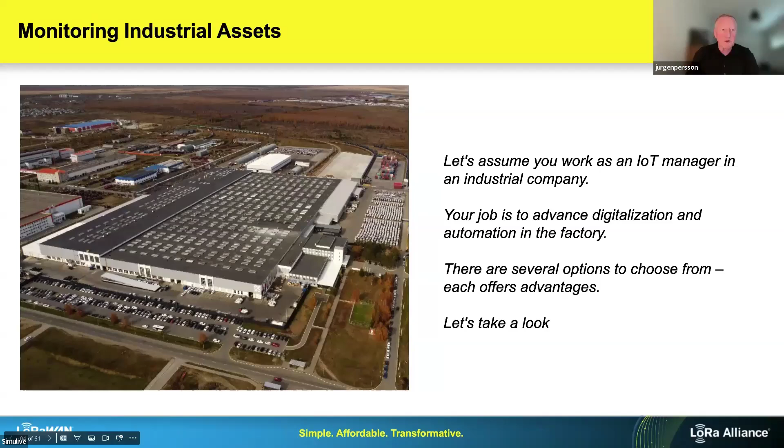We will continue with what we are doing within the LoRa Alliance. Within Smart Industries, we are not only doing manufacturing. By using the technology, we see that there are many industries with the ability to use LoRaWAN and bring digitalization to their operations. Everything from oil and gas, manufacturing, which we are looking into today, chemical processing, power generation and transmission networks, construction site management, general tracking and personal safety, and agriculture, things like machinery in the fields and livestock like cows, animals, and different kinds of things. So this is what we are doing within the smart industry group.

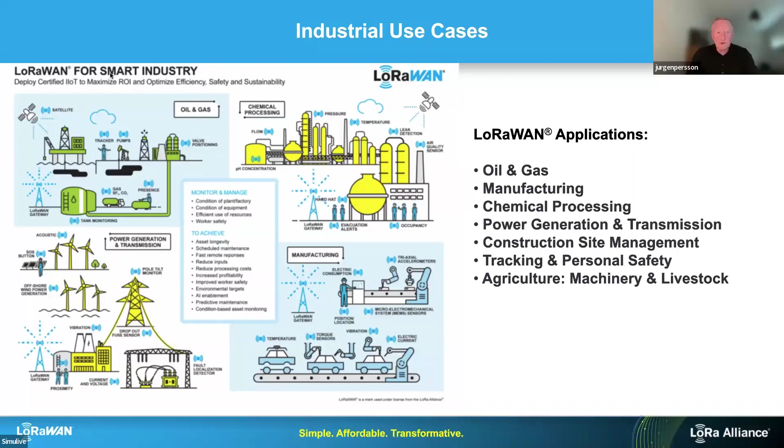I think there are so many opportunities that you can actually run. For today's agenda, I'm more or less done here, but we also have Actility with Nadine, Honeywell, and Pepperl+Fuchs. Let's give the floor to Nadine, and she will present what Actility is doing on the network side and all the features they have.

Hello everybody, and welcome. A few words from my side to introduce myself. I'm Nadine Jäger. I've been working at Actility for 2 years now, and my position is Sales Director for DACH region, Czech Republic, and Poland. I'm of French-German nationality, and I'm also participating in the German task force of the LoRa Alliance as a vice chair.

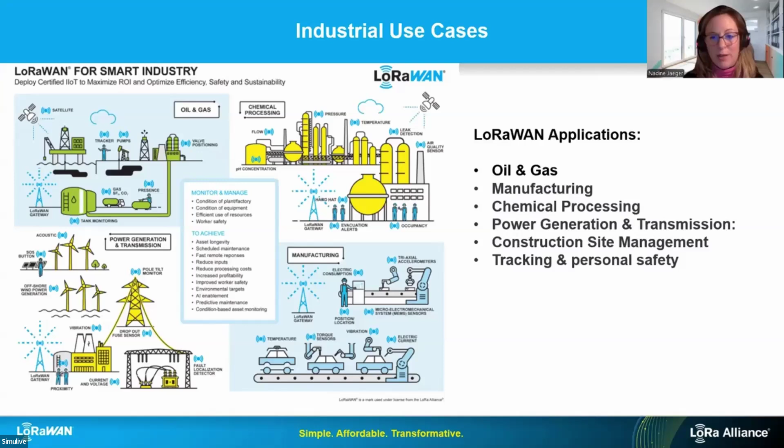But you will hear more real live applications from our partners. So I'm switching to the next slide.

And what makes ThingPark Enterprise, our LoRaWAN network server, a good fit for industrial deployments? Well, first of all, it has an intuitive user interface. It's low touch and has an integrated network and device management.

It's flexible in terms of deployment. You can either have it as a SaaS solution or on premises, independent of the gateway vendor and type on the ISM band. It's easy to integrate for device drivers and multiple cloud connectors.

And it's a future-proof solution, providing off-the-shelf integration to the ThingPark portfolio with, for example, our network-based geolocation with TDOA, roaming with our peering hub ThingPark Exchange, or reliable multicast and FOTA firmware update over the air that is also supported by our network server, or the relay.

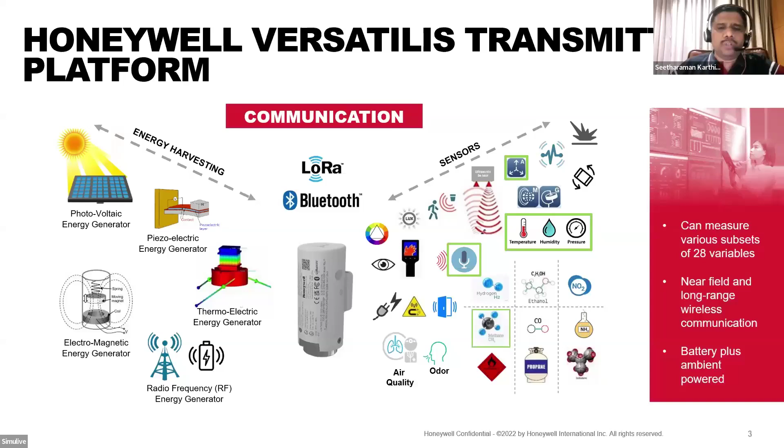The wireless side consists of 2 technologies: LoRaWAN technology for long-range low-power application, and also Bluetooth technology. And depending on the measurement of the device and depending on the amount of energy that gets consumed, technology is available to provide energy harvesting to extend the life of the battery, which is one of the critical customer needs.

And you don't need internet, and it's free of charge. It's a very open protocol and provides excellent penetration into buildings and structures. So that's about LoRaWAN network.

So in this particular solution, what are we trying to do? What is it that we are solving for? Here, we are solving for equipment health and equipment maintenance. We are helping customers move from preventive to predictive, looking to reduce the unscheduled downtime, looking to reduce the manual data collection, looking to minimize field trips, make the operation sustainable, and ensuring that the time to repair is reduced, overall leading to reduced maintenance cost and reduced operation cost.

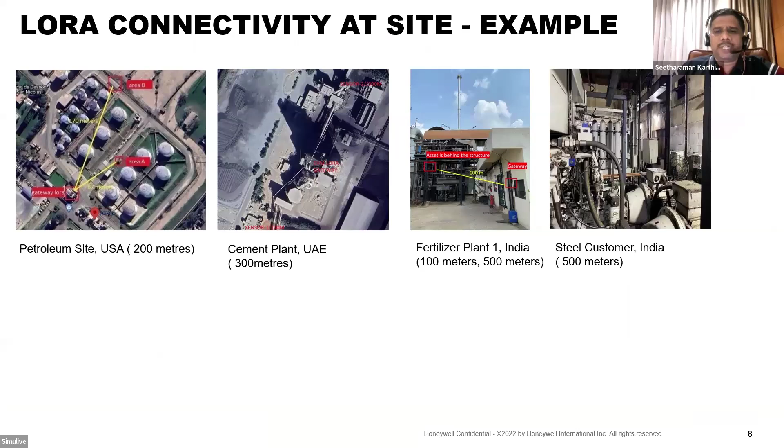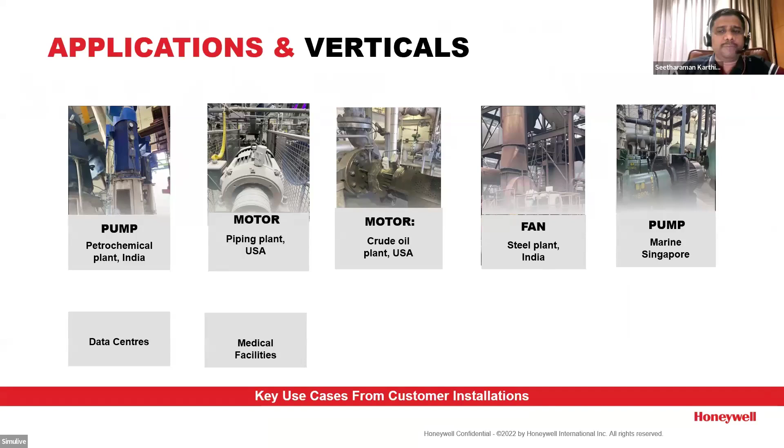Let's look at some of the use cases, which is a significant part of this particular webinar. These sensors are already deployed in several industrial facilities, including petroleum sites, cement plants, fertilizer plants, and steel customers. They're also deployed in several types of rotating assets, including pumps, motors, fans, and other rotating equipment in different facilities. We will talk more about them.

Let's look at some of the important applications. One important application has been the monitoring of fans used in steel plants. In the steel plants, the fans are used to remove dust particles, and ensuring early detection of the problem has been very important. Looking at valuable velocity RMS data, the sensor could provide such an important alert to the customer, thereby avoiding downtime.

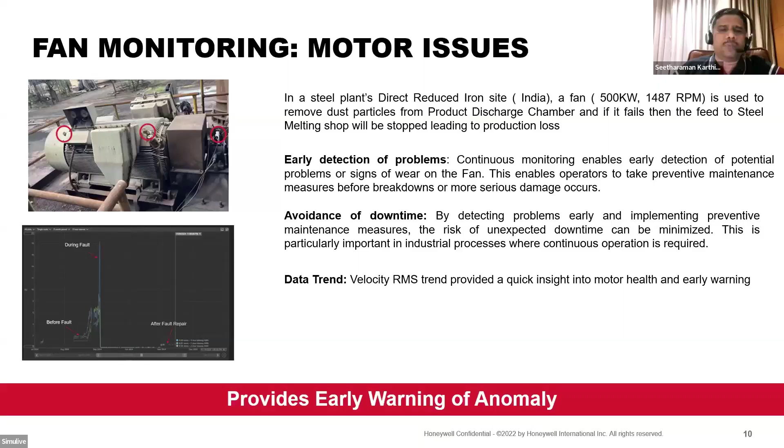Similarly, there were instances where remote monitoring of pumps is enabled in some marine facilities. Here, based on the inherent feature that is available, which includes monitoring the equipment based on ISO parameters, multiple rotating assets are remotely monitored, helping customers minimize manual work and avoid unnecessary trips to these remote applications. Another interesting application is the ability to monitor hydraulic motors in the manufacturing of pipes.

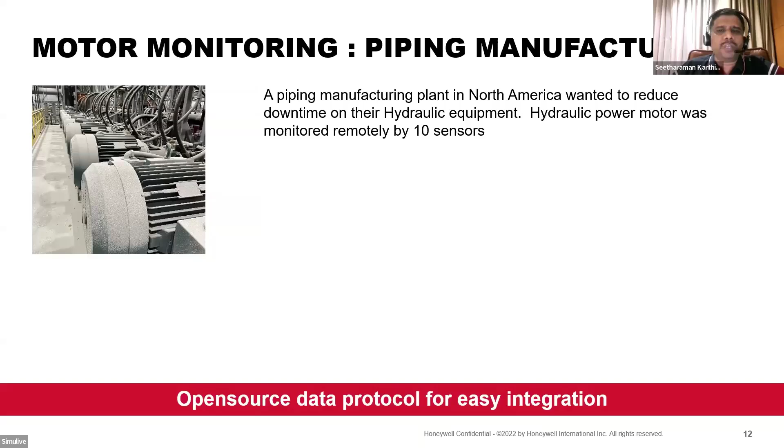There are several such assets available in piping manufacturing, and monitoring them for any proactive maintenance is extremely important. Another interesting application has been in paint shops.

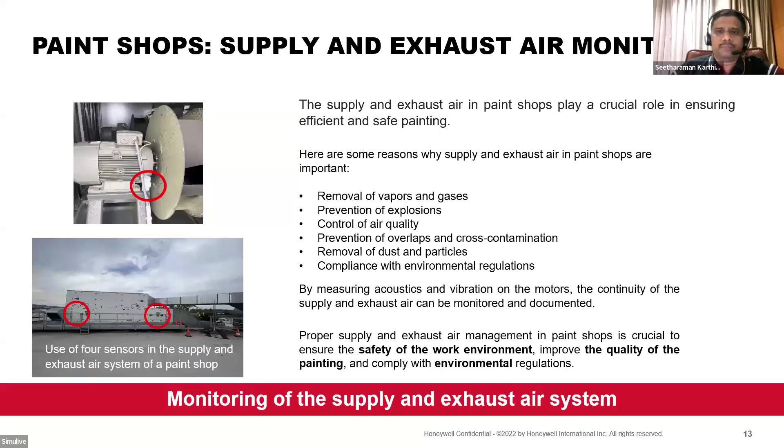Similarly, in some of the ovens and drying systems where painting is done on assets, monitoring of ambient temperature, surface temperature, as well as humidity is extremely important. For example, in this particular case, the surface temperature of the oven is measured, which helped understand what the typical temperature is going behind that.

If the temperature is too high, the paint may peel. And if it is too low, then it leads to some other problem, calling for reworking of the entire workflow. This has been deployed to ensure the process has high efficiency and also that the quality is maintained.

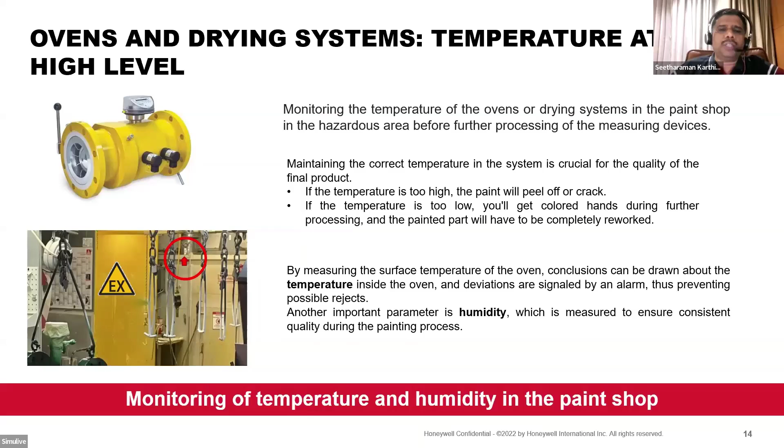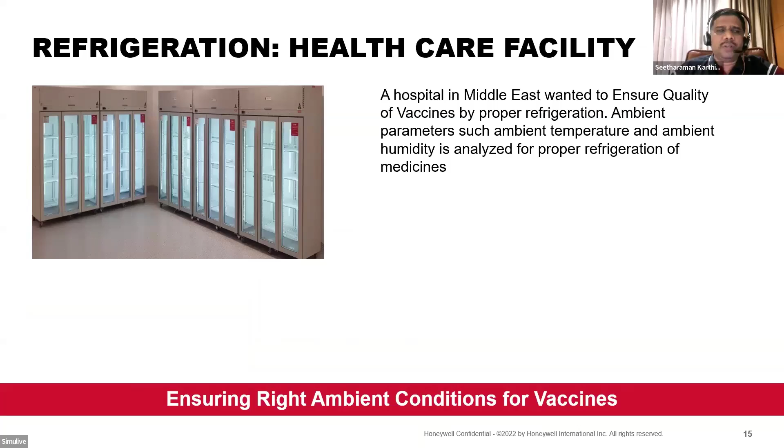Another interesting aspect is the ambient monitoring system, specifically used in healthcare facilities. In this specific case, in a Middle East healthcare facility, the ambient parameters are remotely monitored to ensure that the medicines are of high quality, because ambient temperature and ambient humidity are extremely important. This ensures the right ambient conditions, which is extremely critical, and Honeywell Versatilis systems, in view of their capability to measure ambient parameters, have been extremely useful.

Another aspect of ambient monitoring is the server room. Overheating has to be prevented, while at the same time energy efficiency has to be maintained. Humidity control is very critical. For such facilities, remote monitoring of ambient temperature and humidity utilizing a multitude of Honeywell Versatilis sensors has been extremely helpful.

If you look at the summary, the solution not just automates the data collection, thereby saving labor cost. The rich data set coming from the sensor, with the help of either Honeywell software or even a third-party software, provides the right level of insight and anomaly detection in real time. This in turn helps customers take quick action, and it's also possible in the Honeywell software to have alerts sent on email.

This means that the customer need not sit in front of the station all the time; they can go around doing their work while they get alerts over email. The overall solution helps customers to plan and maintain. In addition, the software provides valuable, rich health reports, which can be used by reliability engineers, maintenance engineers, and plant operators. More information about Honeywell Versatilis transmitters can be discovered through our website or by reaching out to our account managers.

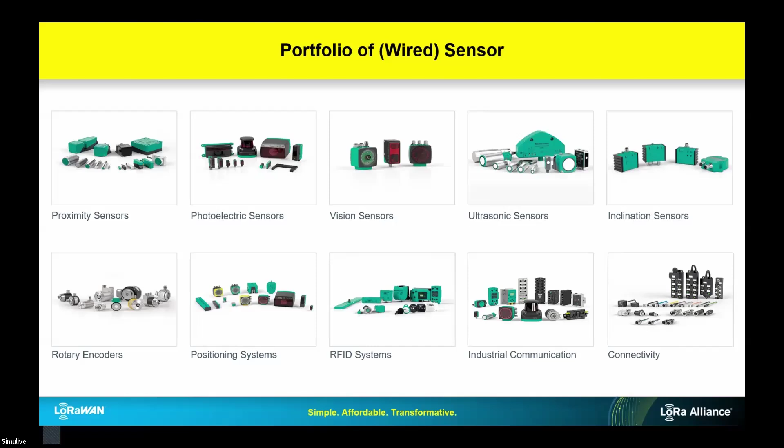Starting on the left side, we have our WILSEN.sonic sensors. For your info, WILSEN always stands for wireless sensors - that's quite important to know. The WILSEN.sonic sensors are ultrasonic sensors for distance measurement, starting with the smallest version for distance measurement up to 2.5 meters, then the medium version up to 4 meters, and the largest version for measurements up to 7 meters.

In the middle, you see the WILSEN.valve sensor. It's a sensor we launched last year in September, for monitoring valve positions - whether a valve is open or closed. Last but not least, we have our WILSEN.node sensor, a solution for various detection tasks. You have a little box, and you're able to connect several sensors or technologies to it. You can add two sensors and choose from inductive sensors, capacitive sensors, float switches - there's a wide range of sensor technologies you can add.

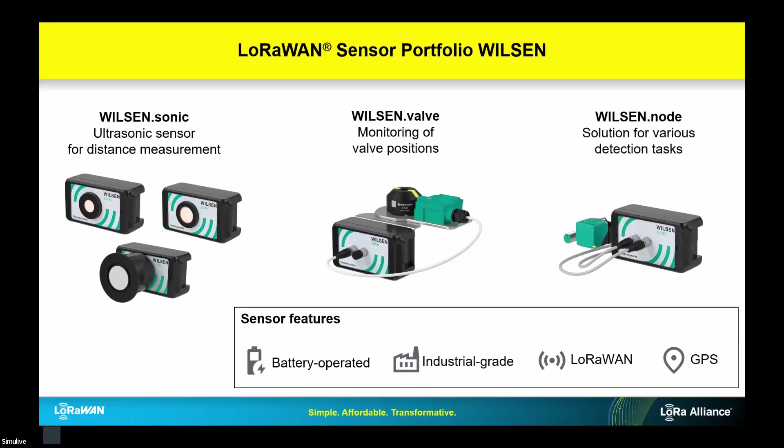Okay, let's jump into some of our applications. The first one is with a famous German car manufacturer - it's about container level monitoring. The customer needed to understand the filling level and position of containers and tanks inside the factory, so that employees would empty and refill them as actually needed. So they're looking at a dashboard to see where the container is located, what the filling level is, and they can act as needed.

For that case, the customer chose the WILSEN.sonic sensor, as you can see in the picture on the right side, to reliably detect the filling level using robust ultrasonic technology, and the position thanks to an integrated GPS module. The benefit for our customer was that he reliably and quickly automated the fill level monitoring in his plant, and now has high transparency about the condition - so no more empty runs for his employees.

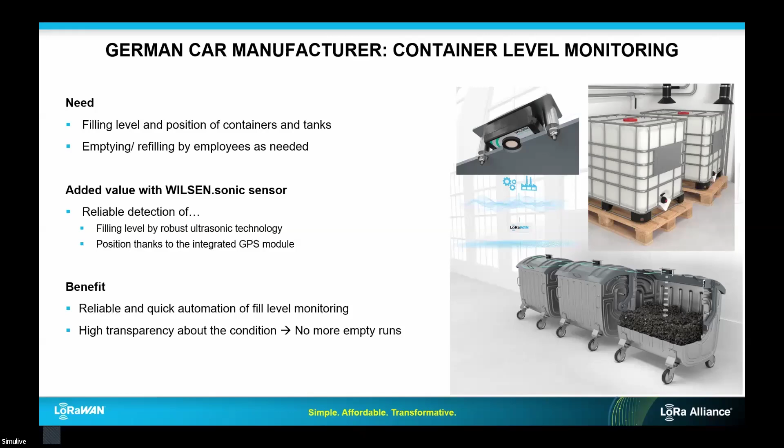Okay, let's switch to another application with European Aviation Group about the automation of intralogistics. The need for this customer was to monitor if the storage area in his facility is occupied or free, so that the automated guided vehicle, an AGV, can deliver its load. And after the load is delivered, the customer also wanted to continuously monitor the fill level of the load.

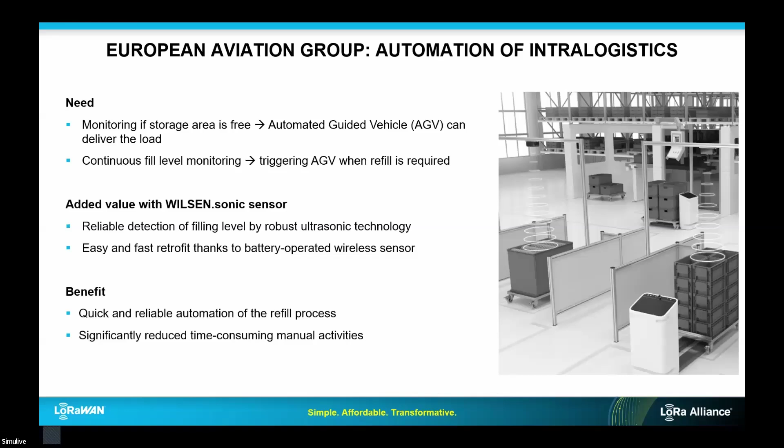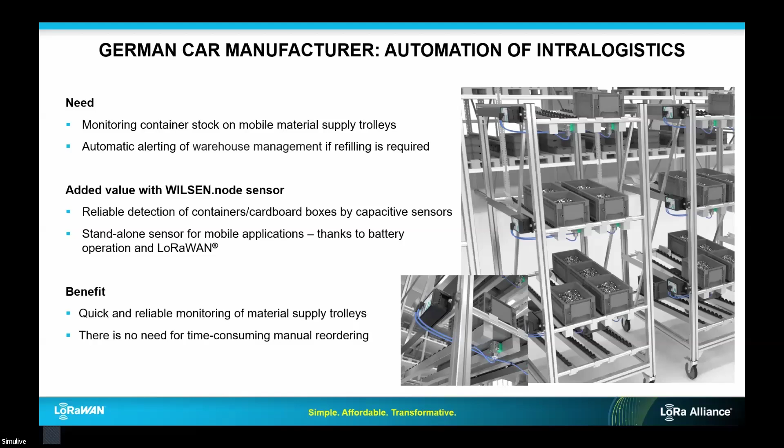The benefit for this customer was that they were able to quickly and reliably monitor material supply trolleys, and there's no need for time-consuming manual reordering anymore.